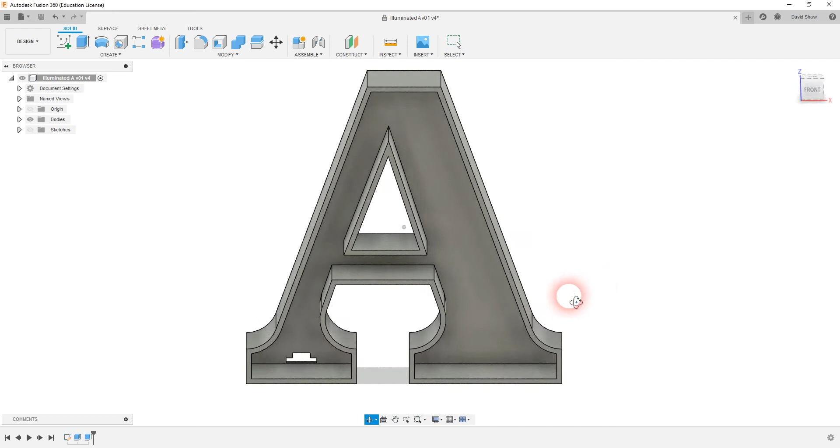So here we are. Here's my 3D model in its current format for 3D printing. I can see the profile here, the 3D model for my mood light case with my ports at the back for the micro USB port. What I need to do to create this view is first add on the front acrylic window. That's the first thing I'm going to do in my design view.

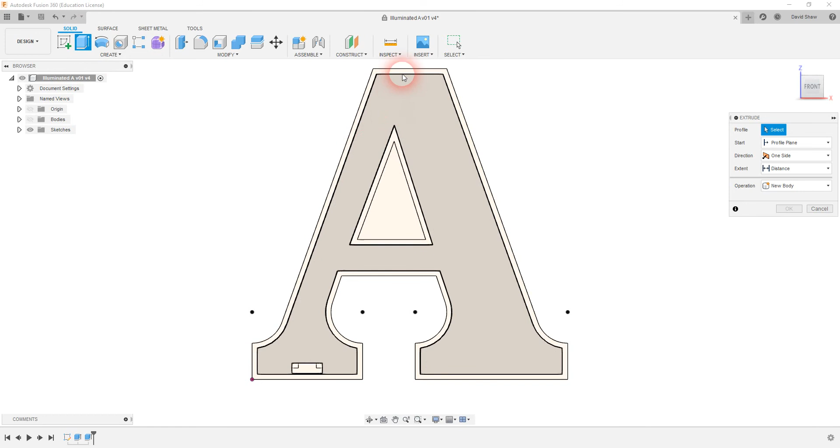First, let's turn off bodies and turn on sketches so I can see my original sketch for this design. What I'm going to do is a new extrusion, which is basically all of these profiles, because my window at the front is going to be a complete letter A cutout. Let's set that to a depth of 3mm, which is the thickness of my frosted acrylic window.

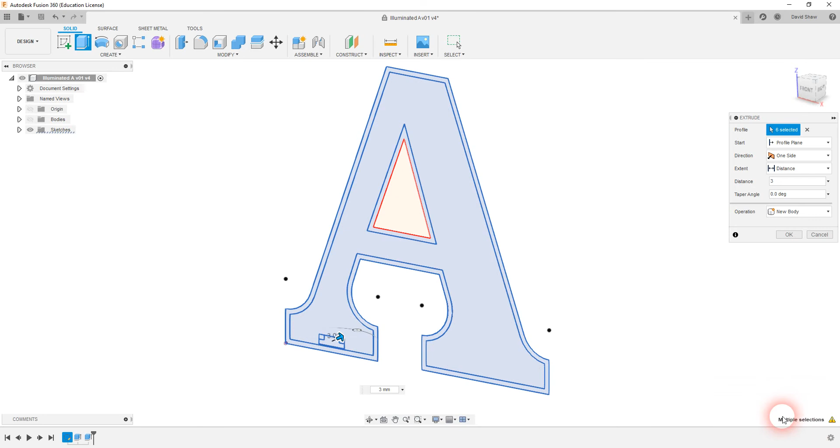Now if I turn that around, I can see I cannot see what's extruded. There was a warning saying I couldn't see it because my bodies weren't turned on. So let's turn on bodies, and now hopefully I can see there is an extrusion happening. In fact, the extrusion I'm doing is this one right here.

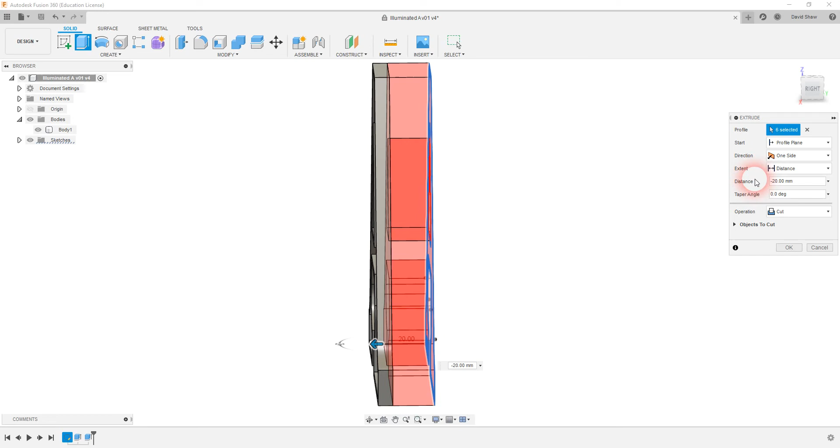You can see that I can project it out behind my letter A or project it through my letter A forwards. As I project that towards the front of the design, the way this design has been built, it actually becomes a negative distance. So let's set that to negative 3mm, so it's coming out towards the front of my light.

You can see here that currently this acrylic window is at the back of the design, and of course I want to have the acrylic window on the front of my 3D print. So I need to change the start of where this extrusion begins.

I'm going to do an offset plane set above the back work plane of this letter A, and the distance I want to offset is going to be equal to the depth that I extruded this original letter A, which in my case was 27mm.

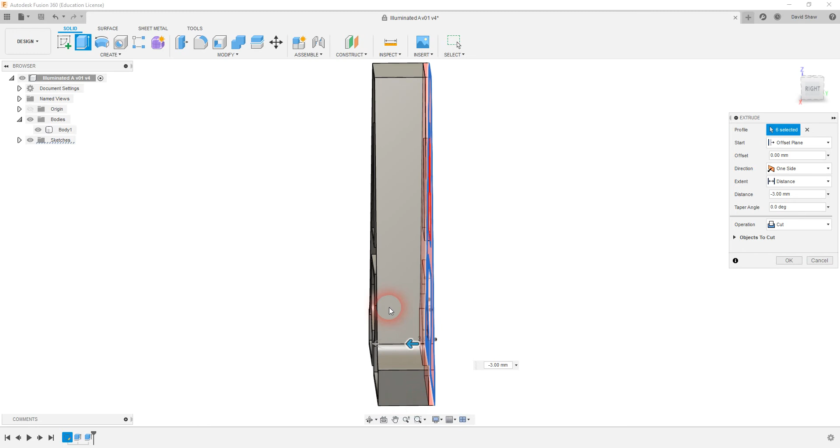Now if I dial in 27, what's going to happen is it extends it back away from the mood light, and I want it in front. So if I put that to negative 27, you can see that's now appearing in front of the design. In fact, if I put it to 28, you can see there's now a 1mm gap between my acrylic window and my 3D print.

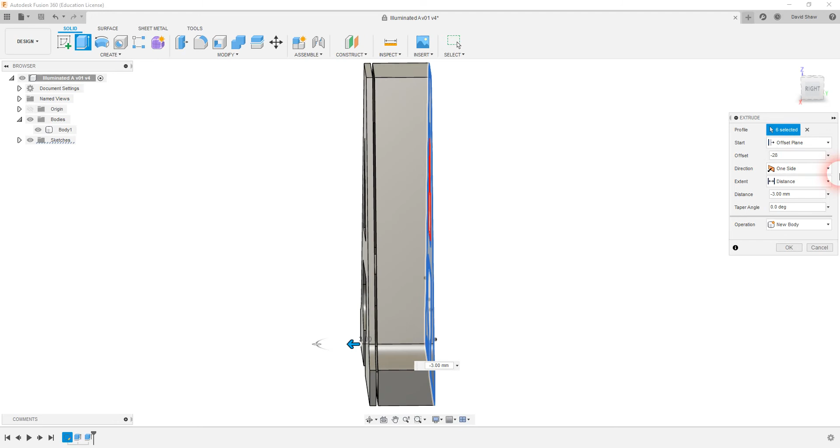At this point, notice I've got here in operation, this is a new body. If I set that back to 27, it changes to join, because the computer assumes I want to add it onto my existing solid model, which I don't, because I want my acrylic window as a different material, a different body completely. So I'm going to have that as a new body, and there it is in front of my original 3D print.

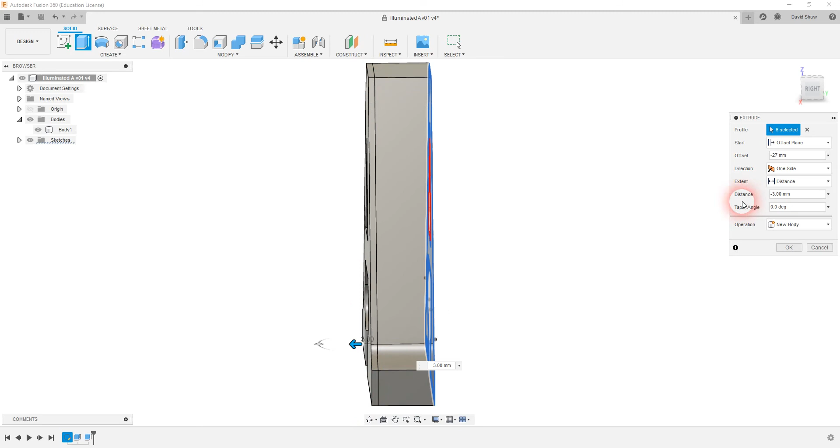So let's confirm that, and I'm just going to rotate this around. I can see that is my window. In fact, I can make that little window disappear and reappear, and I can make my original 3D print body disappear and appear again. So that's looking really good.

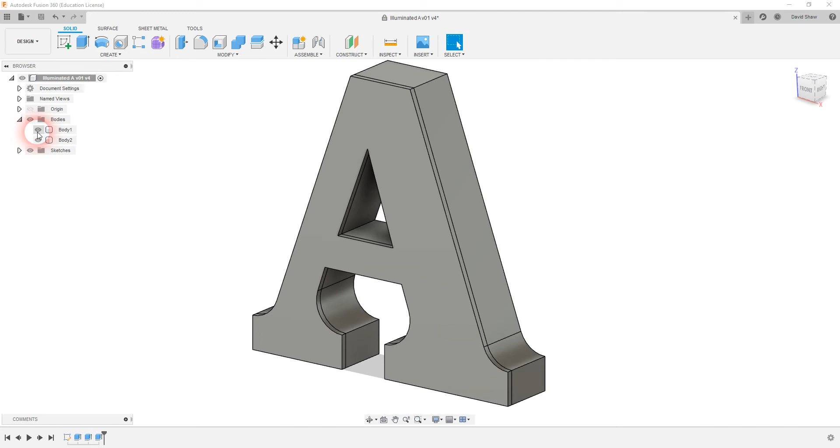Now at this point I'm going to go into the rendering mode, and I'm going to see how this looks as a render without the LED lights. So first thing, let's go to render. I was going to save it at this point, but now I'm going to apply the render settings first, and then we'll save it. Okay, so in here there's one thing I'm going to do with the setup, so scene settings here.

The one thing I want to do here, if I scroll down, is change the aspect ratio to be a 1:1 square ratio like this. Don't change anything else in here. I'm going to leave everything else exactly as it is.

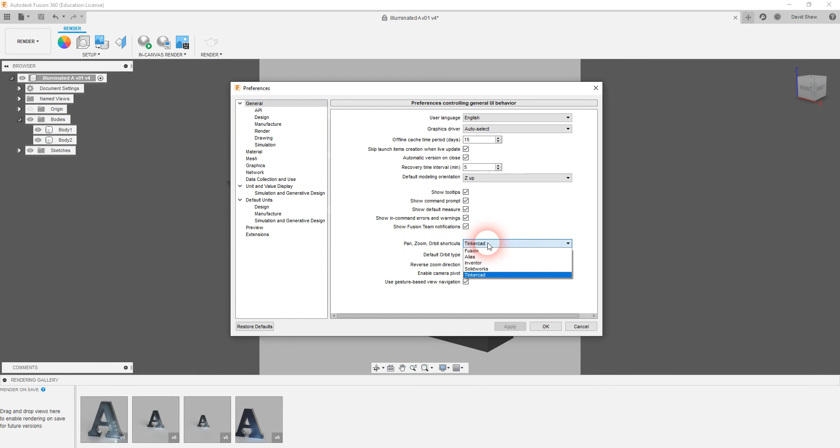Now what I can do is right click. In my case, I've got my pan, zoom and orbit shortcuts set up in Tinkercad, which means I can right click and pan around, and of course wheel mouse in and out. So I'm going to use those techniques to position my A where I want it to be. I think that's looking quite nice there.

So let's now think about how we're going to render this in terms of materials. I've got the appearance option up here. I'm going to click on this, and I can see I've got quite a few options open at the moment, so let's bring these back. Okay, I'm going to take it back to there, scroll down here. First of all, I'm going to do the main body. If I scroll up, you can see at the top of this appearance menu we can apply textures to either whole bodies or faces.

In this case, I want to apply it to bodies, because remember I've got two bodies here. Body 1 is my 3D printed case for my mood light, and body 2 is the acrylic window. So I'm going to apply textures or materials to complete bodies.

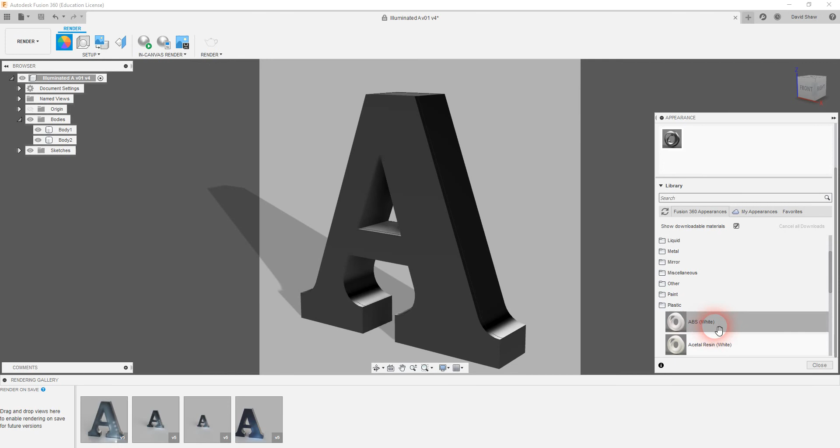For my 3D print, I'm going to scroll down here... okay, I'm struggling here, folks. Here we are, plastic. Let's go to plastic, and I'm going to go with ABS. In this case it's going to be white, but that's the material our 3D printers work with. So let's drop that into body 1 here, and now you can see that has got a white ABS material.

Now, of course, we did ours with a grey filament, ABS filament, so I'm going to right click on this. Here at the top, where I've got my details for my material rendering, I'm going to edit this. I'm going to change this to grey, and these values here are the RGB, red, green, blue values of this particular model.

If I set this to 255, which is maximum red, and the others to 0, this will give me a pure red. If I set this to 0 and that to 255, I now get green. If I set the last one to 255 and the rest to 0, I'll get blue. If I put them all to 255, I get white. If I put them all to 0, I get black, and I want grey, so I'm going to put them all to 128, which is generally viewed as being halfway between 0 and 255. Okay, let's confirm that, and there is my grey ABS plastic.

Now what about the acrylic window here? I'm still working with applying textures to whole bodies and components, which is what I want. I'm going to remove... close that plastics folder, and even though this is frosted acrylic, which is plastic, I'm going to go with a glass finish here.

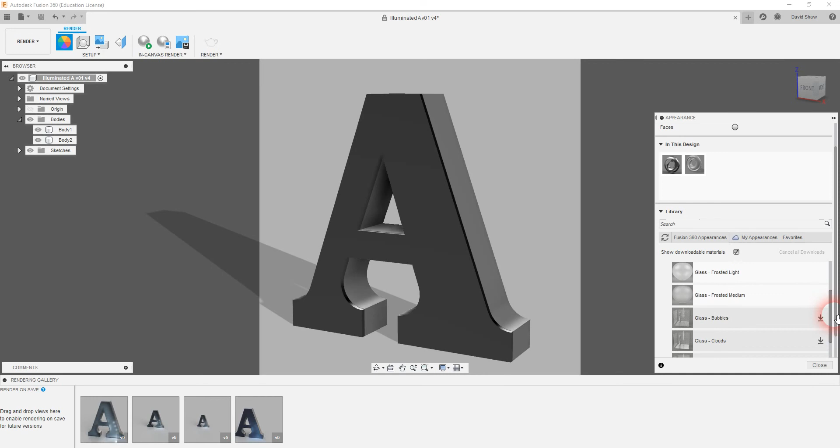As you can see, I've already got the glass textured window open, and I'm going to go with the medium frosted glass finish here. Let's confirm there - yeah, I believe that's the one I want. So I'm going to drop that medium onto the acrylic window here, and now I can see it's semi-transparent and I can see through it.

But if I right click on this, I'm going to edit this, and I'm going to call this frosted medium, and I'm going to do it in purple.

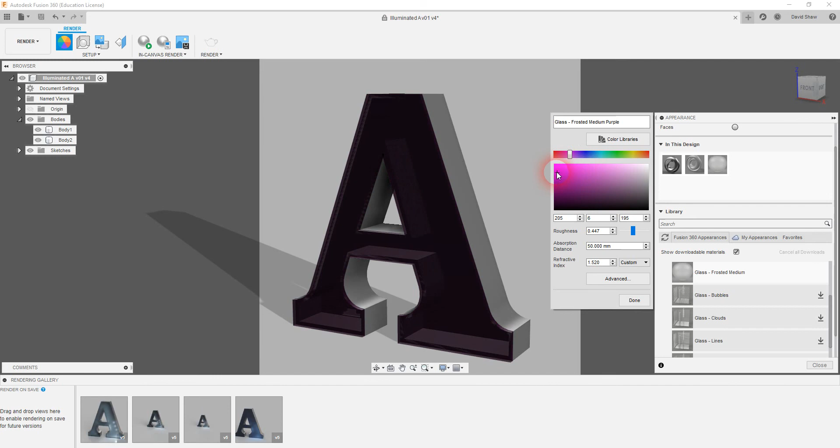Okay, now I'm going to move this slider all the way across into the purple area, and then move the particular shade of purple over here. I think I'm going to make this quite deep. I could make it a little bit lighter, but when I add in my LED lights inside, I think it's going to look better if I have a darker shade of purple there.

If I spin this round into the light, I can see the kind of purple I'm getting. Let's have a see. Do I need to modify this at all? Either way, maybe a little bit more bluey purple is the way to go. I'll go with something like that, and I can change it later, but that looks great.

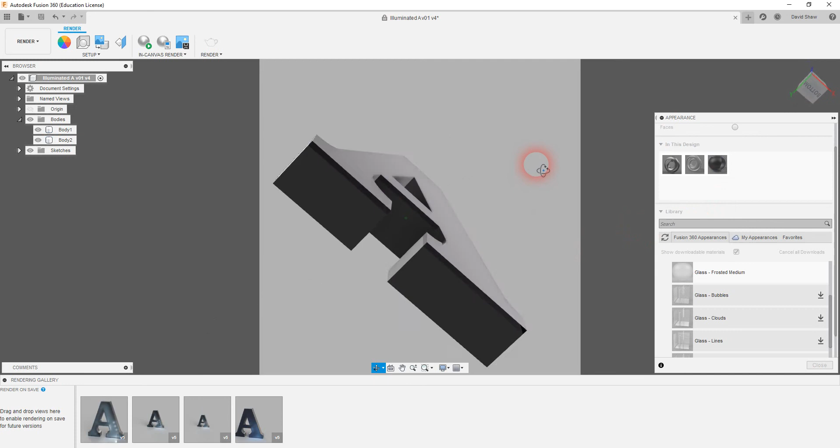So there we are, that's my design so far without the LED lights. I think what I'm going to do at this point is close that and go ahead and render it - you can see some of my previous rendering examples down here. So I'm going to render this and see how it looks.

Before I render, I need to save it. Let's do that first. File, save as, and I'm going to save this as... I don't know, Illuminated version 3.

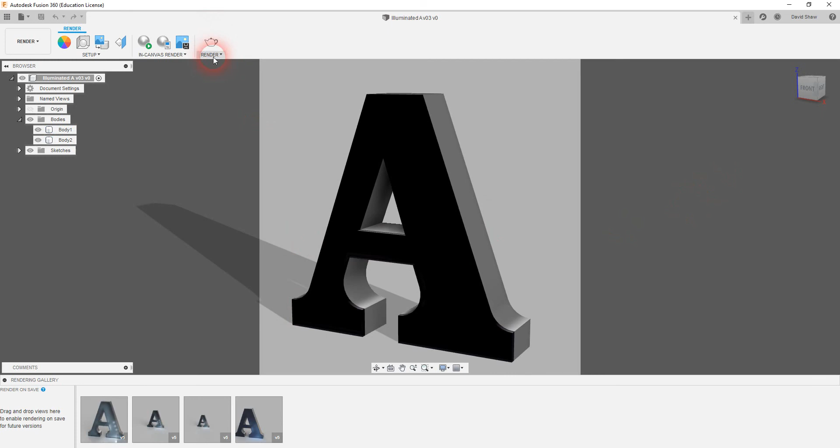Okay, so now hopefully, yeah, look, there's the render option available, and bizarrely when you go to the drop down menu there's only one option available, whereas the others at least have got a bit of a range there. So let's just go to the teapot render, and there are a few things to change.

I want to go with a local render. If I go with cloud rendering, it gets rendered on servers online and I have credits to do this, but I'm not going to bother with that - I'll go with a local render. I'm going to go with standard quality, and keep the resolution at this point at just 733 by 733 pixels. So it's not a particularly high resolution image, but it's just to see what I get.

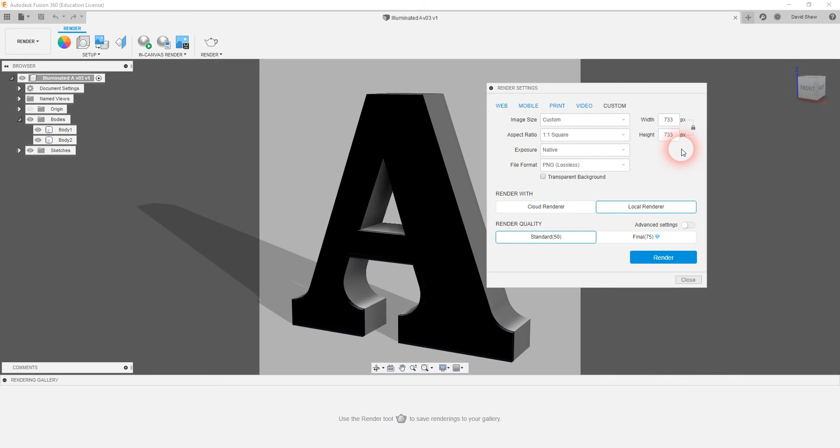Let's go to render - I should see something happening down here in the bottom left hand corner. Okay, I'm just going to have to be patient here a little bit. I'm going to pause this so you're not having to sit through this in the video, and we'll pick up again when something exciting is happening.

Okay, so yeah, nothing seems to have happened here yet, and I've been looking at this for about a minute. Oh, there we are, look - it's actually just finished, and it's ready for me to preview. That was quite strange because I didn't see anything appear down here. Normally you see like a little progress bar, and it didn't. So clearly, if it doesn't appear, just be patient, it will eventually appear.

And there was something else I was going to show you in terms of Task Manager to monitor system usage, but I'll perhaps look at that in the next video.

So let's have a see, what have we got? If I come down here and click on the little plus, then what I get is my rendered image, which I have to say is looking pretty cool, and I can now download that to wherever I want. I'm just going to pop it in there. I can give it a proper file name, and that's ready for me to add to documentation or print out or whatever I want to do with it.

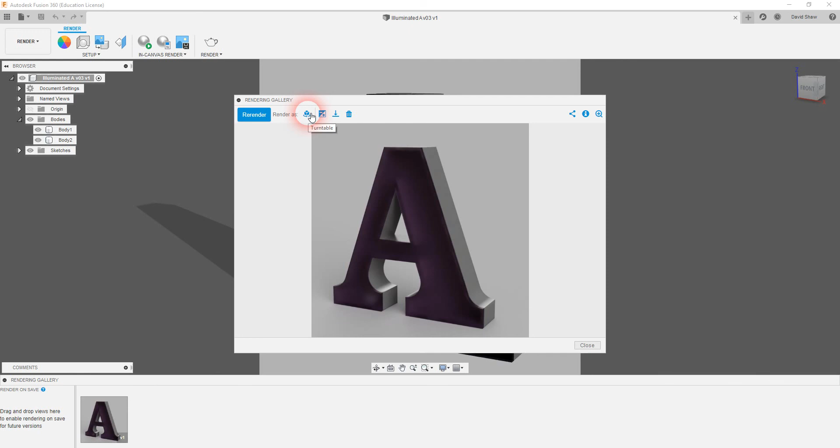But that's looking great. Incidentally, you can also do some pretty cool things here - you can render this as a turntable image, which would take a lot more time for the rendering to be completed, because it means you can actually view this in a suitable web browser extension as a 3D model and kind of spin it around live. You might have seen that with videos of cars or products online, where you need 3D renderings and be able to spin it around, which is quite cool.

Anyway, I'm not going to go there. I'm going to stop this video now, and I'm going to do another video where I'm going to talk about how I introduce the little LED lights, how that looks, how I apply the rendering of the lights, and how that looks when it's finished. So hopefully I'll see you then.